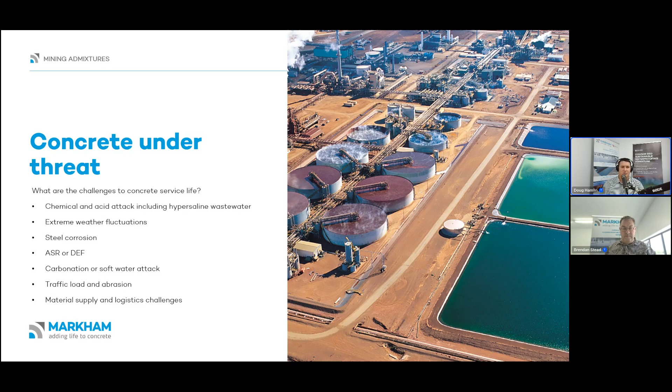Go to the next slide there. So, thinking about these threats and then the impact of them. Downtime is probably the biggest one. Mine sites are there to make money essentially out of the ore that they pull out of the ground. If you have any downtime, that's costing them, and they do everything they can to limit it.

Concrete repair, unfortunately, is one that does pop its head up, where you get that breakout, repairs are done, and then if nothing's done to protect that repair and protect the concrete around it, you get more breakout beside that repair, and it kind of cycles on like that, and you get that happening sometimes as soon as every 2 years, but normally around that 5 to 10 year time period.

And then ultimately, these threats can cause the structural integrity or the lifespan of that concrete to be reduced. So it's not doing the job it was intended to. It's not providing that foundation or that structure for the processing plant or for the mine site there.

Other things is traditional mix designs. So when you're looking at some of the things like microsilica is a good example. There's other admixtures that can interfere with the critical properties of concrete. So things like the slumps, the set times, strengths, those sort of things need to all be taken into consideration when you're choosing a durability method to overcome these threats. You don't want to be getting high durability, but then having a concrete that's very difficult to place, for example. Go on to the next one there.

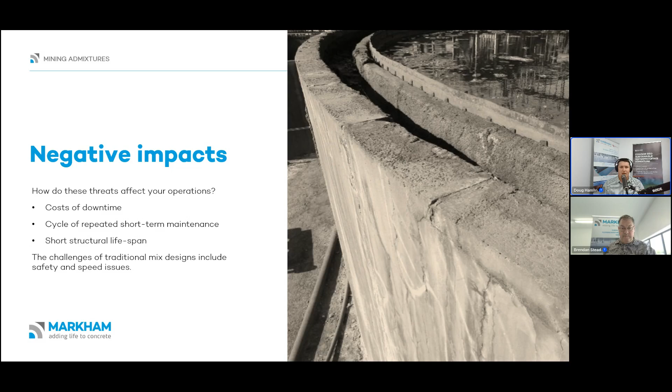So yeah, Markham recommends protecting the concrete from day one. That's the best way to be sure that the concrete is going to get the best chance. So you're not letting any contaminants into the concrete from day one. You're not letting that concrete be attacked. You're getting that protection right from the very start. So we recommend the use of hydrogels.

They do a very good job of durability, but then they also fit into the construction program or the construction methodologies very well too. So what they do is it's a colloidal silica that reacts with the calcium hydroxides in the concrete, or the alkalis that are always a byproduct of the cement reaction, and they form a hydrogel within the porosity, and it stops the moisture moving through the concrete.

Now, as soon as you stop moisture, you block that contamination from being able to move through the concrete. So if that was from day one, you're stopping it. If you do have a structure that's down the track, there is options to spray apply and halt or arrest that deterioration at that point. But the key is that it's stopping that moisture and reducing the permeability of the concrete, which in turn results in long-term durability. Next one there, Brendan.

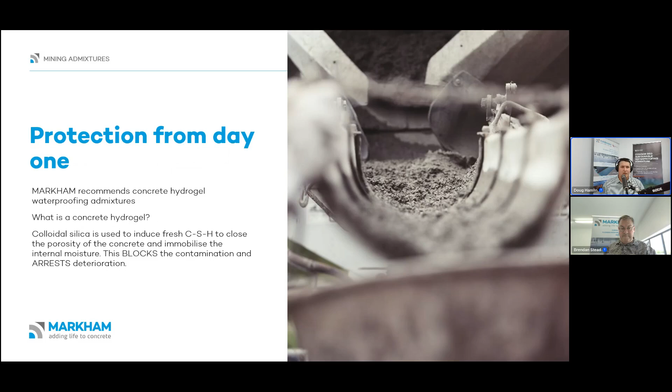So yeah, on constructability, I touched on it before, but with anything we're doing with concrete construction, the key really is the constructability, or how easy it is to place the concrete, how easy it is to achieve the structure needs, that type of thing. So we believe that quality starts there. So it starts with being able to place the concrete easily, to be able to dose an admixture into the concrete, to be able to pump it, whether you're doing shotcrete, anything like that. It needs to be able to fit into all those methodologies and not have any detrimental impacts or interrupt that process too much.

So with hydrogels, because they are a liquid admixture, they go into the mix water, and they don't impact your strength or your pumping ability or the workability of the concrete. In fact, they actually make it better because you are essentially lubricating the mix and you're using up more of the cement in the hydration process, so you get a more workable mix.

They are compliant to the 1478 type SN standard, so that looks at all your critical things like strength, slump, shrinkage, bleed, all those things, and we comply there. So basically, if you take your standard concrete mix and you're wanting to make it more durable, you just take that mix, add the hydrogel to it, and then carry on. There's no need to revisit all the mix designs. Next slide, Brendan.

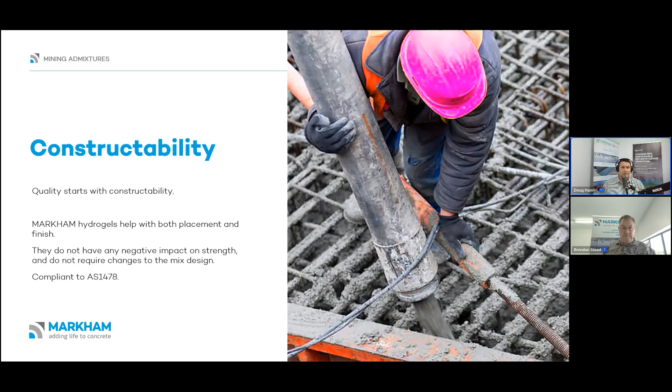So yeah, sustainability and safety. This is a strong commitment here at Markham. In terms of the hydrogels themselves, they are a very low carbon emitting product as far as the manufacture and freight, everything that's associated there. The CONQOR range that we deal with actually comes as a byproduct of geothermal power stations in New Zealand. So it contributes very positively there.

The product itself is water based. It's non-crystalline, so it doesn't have any crystalline silica in it, so it's not posing a silicosis risk. They don't smell, so they don't give off any solventy or ammonia odors, and they have a nil VOC content, so no solvents, no volatile organic compounds. So as far as being safe, it's excellent in terms of handling, transport, dosing, placing, everything that you need to do with the product or with the concrete on site.

We do have the EPD declarations available, and they can be put into your project numbers if you're going for a Green Star type build, and they're published and available on the EPD website. So move on, please.

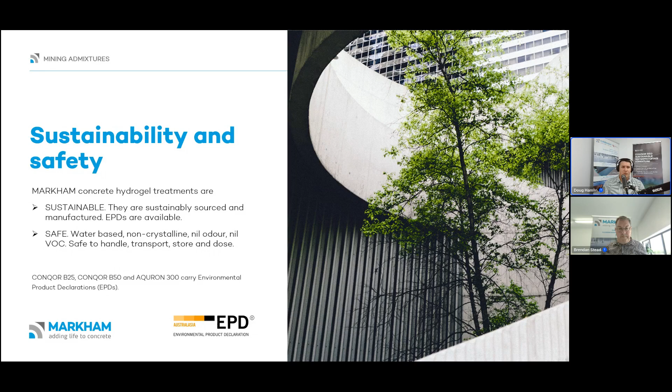Back to the topic of being easy to use. So I mentioned earlier they are liquid, so a water-based liquid. They have a reasonably small amount of active ingredient with the colloidal silica, but because the colloidal silica is a nano-scale product, the size particles we're dealing with are very small compared to, say, something like a microsilica or fly ash, where you've got bigger particles. And what that means is that you get more reaction with less product.

So typically into concrete mixes, we're putting between 2 and 3 litres of product per cubic metre. Now this is a lot lower than some of the powdered admixtures, and also a lot lower than some of the other traditional admixtures, which are upwards of 20 litres per cubic metre. So it is very easy to put in. It doesn't affect your water demand or anything like that. And as far as transporting them to site, logistics, that sort of thing, it's a very low cost there.

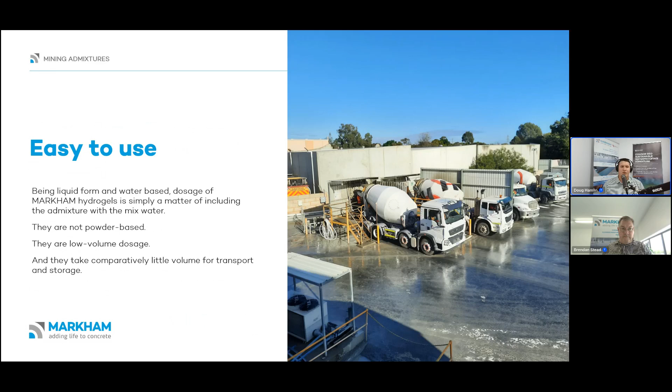What's more important, though, is that once you put that admixture into the mixed water and it goes into the concrete, that mix is very easy to pump and place. So we're getting regular feedback of pump pressures being able to be lower, so less wear and tear on the machines. And then that translates into being easier to rake and screed for the granos on site as well. So if we could go to the next one there.

Just want to have a look at a couple of projects here. So first up, the Mount Ida project. It's lithium and gold. Lithium is a very abrasive material, so moving it around on the slabs, you get that wear. It's harsh on the concrete. Also this site, being remote, had hypersaline waters as well. So in the process plants, the wash down was all extremely high salt content. So they used the hydrogel admixtures there to protect against that.

As a side benefit, it was poured in some very hot conditions, between 35 and 40 degrees. And because the hydrogel is essentially hydrating the concrete and holding that moisture in, it stops it escaping out of the concrete and reduces cracking and shrinkage. Not saying we don't get any cracking, that would be stupid to say, but we'd get a lot less than with a standard concrete, and that translates into longer service life because you're not having those cracks transport contaminants into the concrete and start that corrosion process.

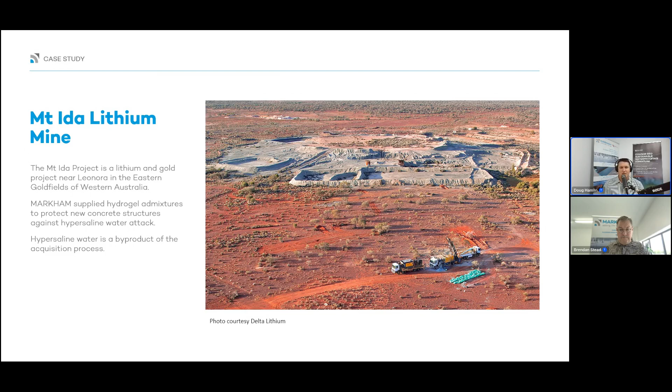Next one there, please. The next one is the Murrin Murrin project. This is really a flagship project for us in the mining space. To paint a bit of a picture, the previous methodology they were using was lasting around 18 months to 2 years before you'd have major damage and it would need to be replaced. There's a wide range of attacks on this project, from sulfuric acid, ammonium sulfate, that type of thing. The acid gets into the concrete and breaks it down. The ammonium sulfate gets in and pulls the calcium or the alkalis out of the concrete.

Either way, you get the concrete breaking down and you get 40 to 50 mil gouges through the concrete, and then 150 mil diameter pits forming. Once they start to form, you're losing the integrity of your slab and you need to repair or rip out and replace that concrete. So they moved across to using a hydrogel as a liquid admixture into the concrete, and then they also spray applied a hydrogel to give a decent cure and provide extra protection to that top surface. They always do an epoxy coating on any of the concrete in the process plants.

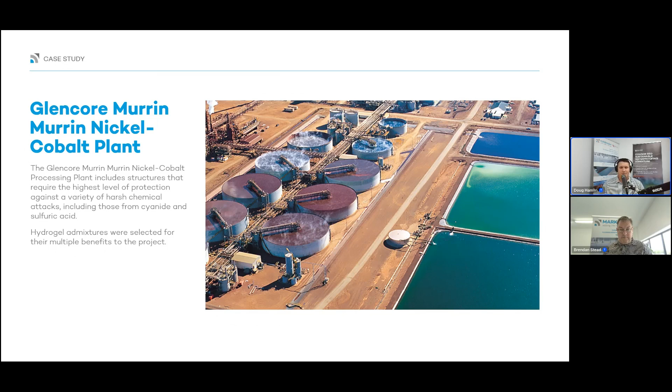The Carapateena project is a great example of the hypersaline water. So this concrete here, they're getting around not even 5 years before there's needing major repairs to the plinths and the bunds in the processing plant. This is a very high concentration of saline in the water here. So yeah, this is both underground and above ground.

And what they're proving is obviously the durability effects of the hydrogel and standing up to the hypersaline water, but they're also getting a better result off the form. So as I mentioned earlier, they make the concrete more workable, easy to use. So you're not getting as much honeycombing and that sort of thing in the concrete. You're getting better compaction, better quality concrete. It's easier to move around in place, so the guys can put a bit more time into the finishing, that type of thing. So essentially it's de-risking the concrete pour there.

Obviously, again, harsh environment, the middle of nowhere, and very hot temperatures for most of the year, and then they'll get thunderstorms and the concrete's absolutely saturated. It gets washed down pretty much every day with the groundwater. So yeah, it faces some fairly heavy challenges there, but it is standing up well, and it's something we're going to keep an eye on into the years to come. And yeah, it's a good example there.

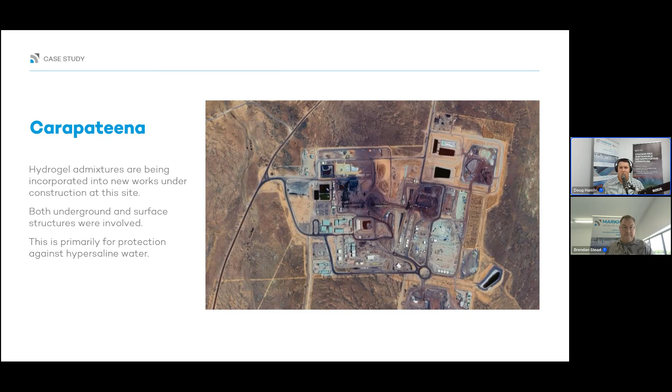So yeah, it's, sorry, Brendan. No, I was just going to say, yeah, we'd be very glad for the audience to contribute. Sorry, please do go on. No, that was all. I was just going to say the same thing. So. Anyway, the chat always asks you to say something nice, and somebody has said something nice, so appreciate that too. Thank you very much.

Just while the questions are coming in, just a question to my mind, which always comes up. Can you say something about the permanence of the treatment, Doug? It doesn't need to be reapplied frequently like a topical coating might be. Yeah, sure thing. So the hydrogels, once they form inside the concrete, whether this is as an admixture or spray applied onto the concrete, they react with the alkalis, with the calcium hydroxides, and form a calcium silicate hydrate hydrogel, which is essentially the same as the binder or the cement paste that you get in concrete.

So once that reaction's taken place, it's very hard to reverse that, or impossible to reverse that reaction. So essentially that hydrogel is in there for the life of that structure. So it can't be removed or abraded off the surface, so to speak, or it doesn't wear like a coating does. So yeah, essentially they are permanent. What you do need to think about is the wear and tear on the structure, loading, that type of thing, and the actual design life of the structure itself is more what comes into play there.

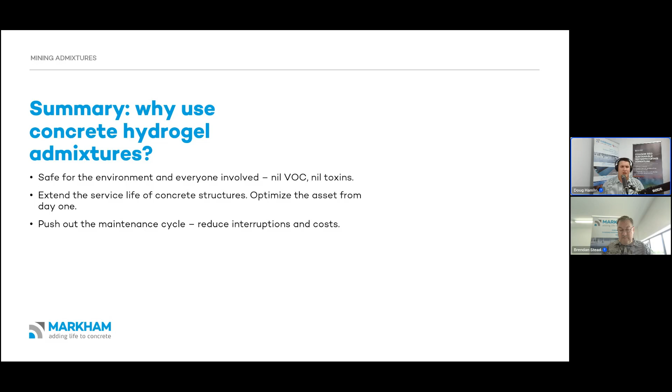In terms of sustainability, they extend the service life of concrete structures, getting the most out of your structure from day one. You're doing the best you can by stopping that moisture and those contaminants getting into the concrete from the very start. And then the maintenance side of things, those repair cycles we talked about, you push them out so they're not happening as regularly. So you're reducing that downtime, reducing the costs associated there and the interruptions to the operation that the structure's in.